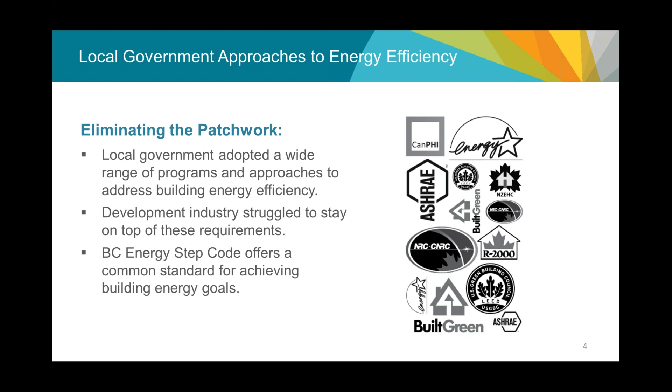Without the building code telling them exactly all the materials and processes they have to use, just doing a really good job of defining the outcome we want and then holding everyone accountable for actually achieving that outcome in a way that makes sense for them. And that may mean something different than the prescriptive requirements we've got in the code.

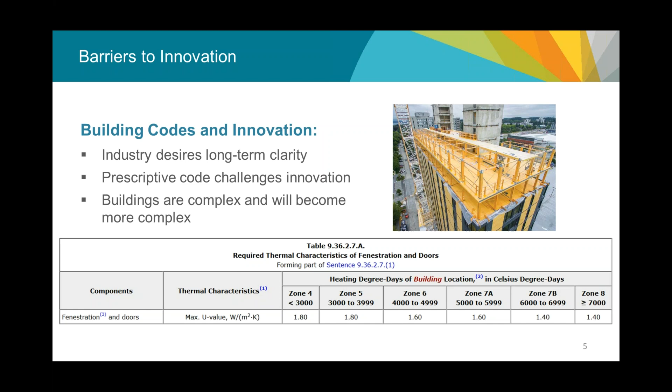It's worth noting before we get into the details, the Energy Step Code is not the product of the province alone. While we did lead the process, it's the result of a consensus building approach where we brought together stakeholders representing a range of different perspectives. We had green building advocates, affordable housing advocates, and a range of different industry groups and experts all at the table, and we worked for 2 years until everyone agreed that what we proposed under the Energy Step Code can work, and detailed the plan around how to make that work in terms of implementation. I think that'll be important in a national process too.

It's not just creating a technical standard, but creating a really comprehensive plan around how we're going to implement changes in the way we build buildings, because that's the biggest challenge we're tackling right now. That requires collaboration with everyone, getting everyone to the table early so each industry can see their own success path in this roadmap towards 2032. It requires an open discussion, getting everyone's ideas on the table and finding consensus, not coming up with a solution beforehand and trying to impose it. I'm pleased with the collaborative approach we took, but I'm here representing a process built on the work of a huge range of volunteers who contributed to this.

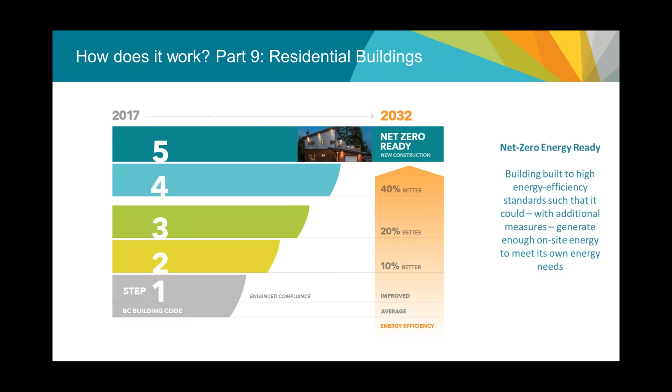So our roadmap to 2032 - I should note, if you see different presentations for different building types, when you work towards consensus with a broad stakeholder group, you often don't get the clean communication consistency you're after. As a result, what we've got for houses and small buildings in British Columbia is a 5-step roadmap towards 2032, built off programs that already exist in the market. The number of steps isn't the number of changes in the building code, because we really only have 2 more editions of the code before 2032. We were trying to reflect levels of performance that already exist in the market in a voluntary way, so we've got 5 steps for homes.

When you get into large Part 3 buildings greater than 3 stories, we only have 4 steps. The end goal is still the same - it's just the logical increments of what builders are already doing, between base building code today at the bottom of the screen, all the way towards our long-term goal of net zero energy ready, ideally by 2032. For non-residential buildings in Part 3 as well, we've only got 3 steps. Again, the number of steps is less relevant - it's the fact that they're all providing that roadmap from where we are today to net zero energy ready by 2032. I think we're likely to see a similar tiered or stepped approach in a national building code.

I should also note, before I move on, the third-party programs shown on the screen today can't be used exclusively to comply with the step code. We haven't referenced any of these programs, except for Passive House, as an alternate compliance path to the step code. They roughly equate to what we do in the step code, but as mentioned earlier, we've redefined energy efficiency in the step code, and it's slightly different from any of the programs, including the EnerGuide rating system that exists. So builders who satisfy Energy Star or Built Green requirements haven't necessarily achieved what we're after in the step code. They're usually 80 or 90% of the way there, but it's important to note that the regulation is slightly different from many of these third-party programs.

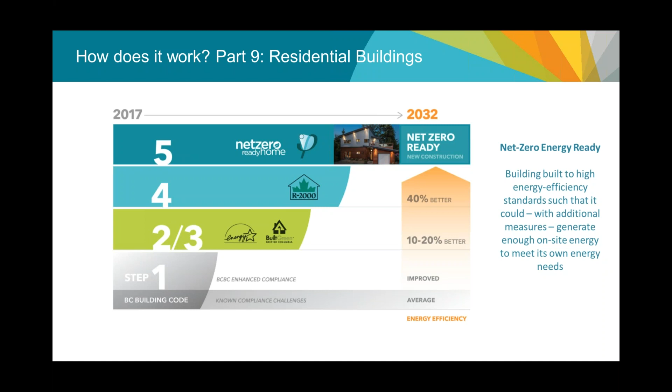The big shift we're seeing in the Energy Step Code in British Columbia, the shift we think is necessary to get to net zero energy ready, is that we need to move towards a performance-based system. We started our discussions in British Columbia around the end goal and talked with stakeholders about what it means to build net zero energy ready, and how builders are doing it today. What we heard loud and clear is that the only people building net zero energy ready buildings today, regardless of how you define that, are doing it with energy modeling and air tightness testing. It's not about a prescriptive checklist of materials you purchase and assume you achieve high performance. If we're going to get to net zero energy ready, the highest level of energy efficiency builders are building to today really has to rely on energy modeling and air tightness testing.

If we do that, we don't need prescriptive requirements, because we're setting clear goals in terms of performance outcomes we're after, requiring an energy model to detail how the building got there in their own custom way, and then holding people accountable through air tightness testing and other inspection measures. To require that and still leave room for innovation, we can remove a lot of the barriers in the prescriptive requirements of the code. We heard loud and clear that there are no programs on the market today that are prescriptive-based and get us towards our end goal. So in British Columbia, we decided that energy modeling and air tightness testing are the skills builders need to become familiar with, that the whole system needs to become familiar with, if we're going to move towards net zero energy ready.

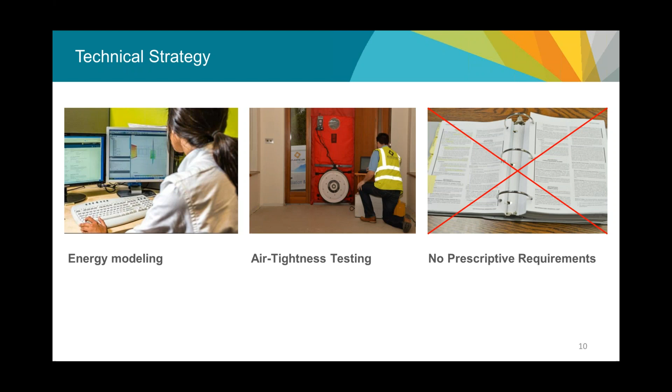The big advantage here - we've got an illustration from a guide we have on the prescriptive requirements in the building code today, and we've got specific requirements for doors, windows, skylights, insulation, depending on where it is in the building. All the details of the building have their own specific individual prescriptive requirements. So long as the builder has satisfied all of these, they're code compliant. But what we found is that really depends on a whole bunch of factors in the home and may not make sense in all situations.

There are some designs where builders may want more efficient windows and ease off on some insulation requirements, or have windows that are perhaps less efficient on a particular building face, and they want to be able to trade that off in a very flexible way. This is how a performance-based approach really allows that flexibility - it removes all of these prescriptive requirements individually and sets one set of expectations for the entire building envelope, then just requires a builder to account for all of those elements and find out what the end result is. It's up to them to choose how they balance that all out.

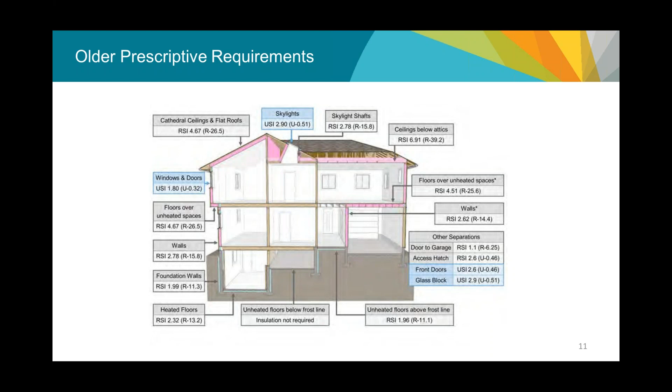It's already a performance pathway in the code today, but for the Energy Step Code, performance-based energy modeling is the only way you can comply with the Energy Step Code. What that does do is really relieve a lot of the challenges we've had with the prescriptive code.

I spent two years as an energy code coach in British Columbia, dealing with builders and building officials trying to enforce the current requirements in the National Building Code, Section 9.36. There are a lot of details that, when you write it out prescriptively, can really cause issues and may be impossible for some projects.

We heard from builders that a lot of these requirements, they know that they don't achieve the energy efficiency gains relative to the amount of work that they require. Telling people that you can't have pot lights in an insulated ceiling assembly doesn't make sense, when a builder can say, well, I can find a way to do that and still achieve the overall goals we're after.

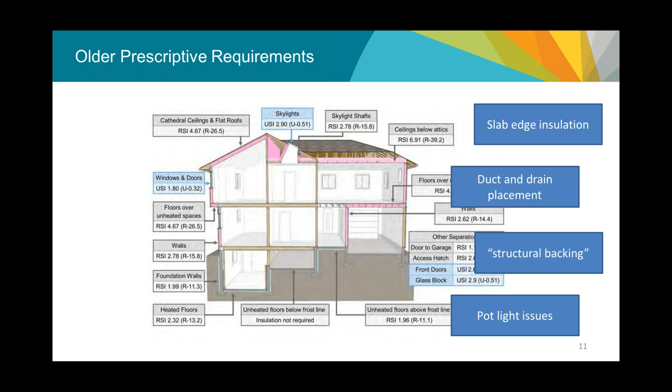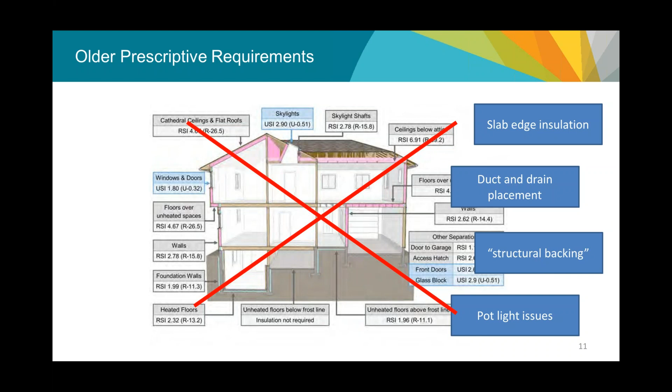But pot lights aren't airtight, and so making them part of the air barrier in a prescriptive code technically can't be approved. In a performance-based system, we can say, well, if you're assuming some air leakage through those pot lights, just make sure the home is airtight through a test. And then the individual components are less important, because what we're after is system-based outcomes. And that's the big shift in the Energy Step Code, is removing all these barriers and headaches in a prescriptive code and getting really clear and accountable on the performance outcomes of the home as a system.

And so a step 3 building just means do an energy model, conduct a blower door test. And for steps 2 through 5, we have specific outcomes that builders have to achieve, or they haven't satisfied the code in terms of airtightness that has to be demonstrated using a blower door test.

And that's really taking a look at the mechanical systems inside the home. How efficient is the heating, ventilation, and hot water systems inside the home, and achieve the performance outcome we're after. They can choose any components they want to get there, but they have to achieve the performance outcome we're after. This is pretty similar to the way we've measured energy efficiency in North America for a long time.

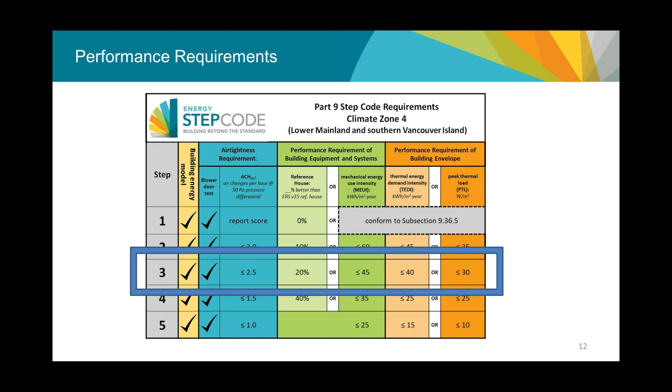So, really worth being aware of this shift in terms of the way we measure energy efficiency. The big change is this shift towards the building envelope.

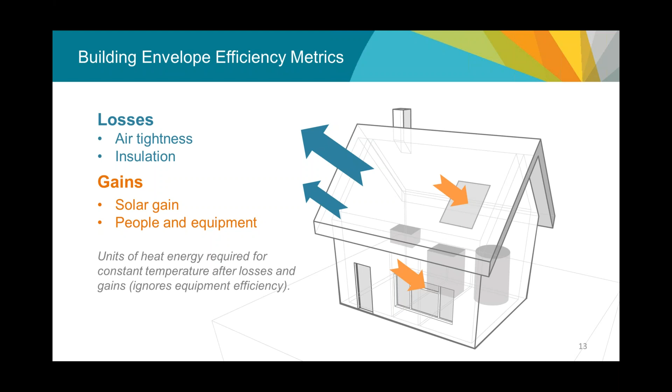I won't go into too much detail here, but happy to share these slides afterwards through Anne. When we're measuring the building envelope, we're taking a look at traditional things, nothing groundbreaking. What's new is that we separate this out from any of the equipment inside the building, taking a look at free gains at the right time of year, and traditionally how we lose energy through the building envelope through insulation and air barrier details.

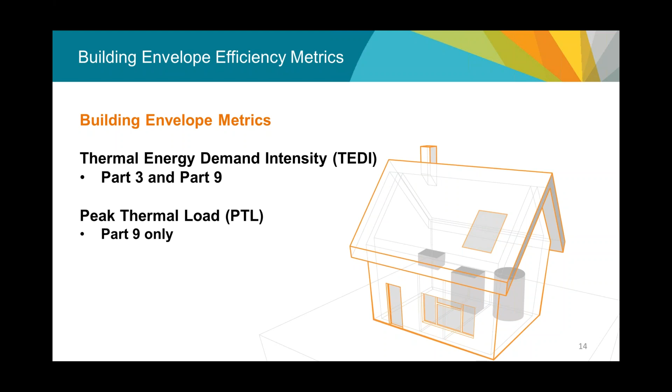That's known as thermal energy demand intensity, TEDI, or peak thermal load. The only difference between these two is peak thermal load takes a look at the highest peak at the most energy intensive day of the year, whereas thermal energy demand takes a look at that annualized over the year, ensuring your average per square meter of energy use in that building is as low as possible. Peak thermal load takes a look at the highest intensity day of the year, and there are different situations where those two metrics might be useful to use.

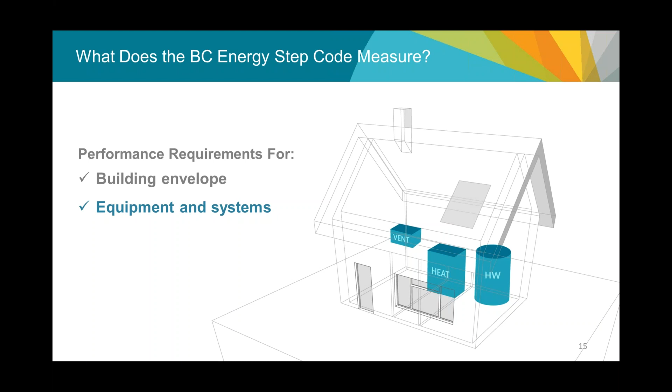Then the other measurements we do have -- we don't want to totally ignore equipment inside the home. We do look at that, but we've separated it out. For ventilation, heating, and hot water, for houses and small buildings, and for large buildings, Part 3 buildings, we're continuing as we do under the National Energy Code for Buildings to take a look at all energy used on site. This is called total energy use intensity for Part 3 buildings -- that's everything on site, our traditional EUI in North America. For homes, it's mechanical energy use intensity. The only difference is that in homes, we scale it down to the equipment that really gets focused on -- we're not taking a look at plug or lighting loads in houses and small buildings.

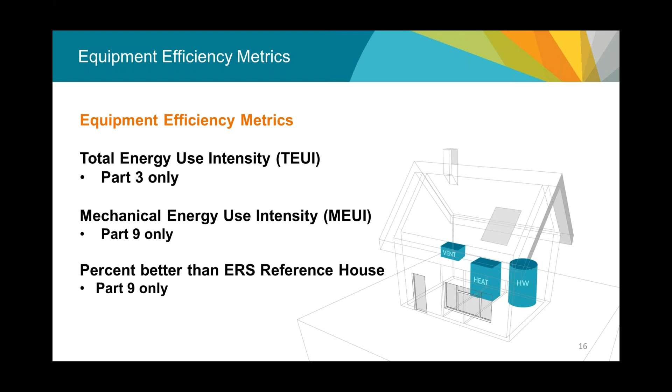And then the other option we've written into our code is that builders can use the EnerGuide rating system, so long as they actually submit their files to Natural Resources Canada, to comply with the Energy Step Code. That's not present today in the National Building Code, but I think would be an important thing to consider nationally.

And then last, but most important, is that we're not just going to assume a building is energy efficient and put it into an energy model -- we're actually going to test it. We're going to do blower door testing on every single building in the Energy Step Code. We think that's certainly necessary in the early years of rolling out this kind of program. We can't just assume energy models are accountable. We know we have problems, certainly in the Vancouver and Victoria area, around air leakage in homes. We need to control that, and the way to control that is to set some targets and require builders to do some testing and be accountable for those outcomes in the code.

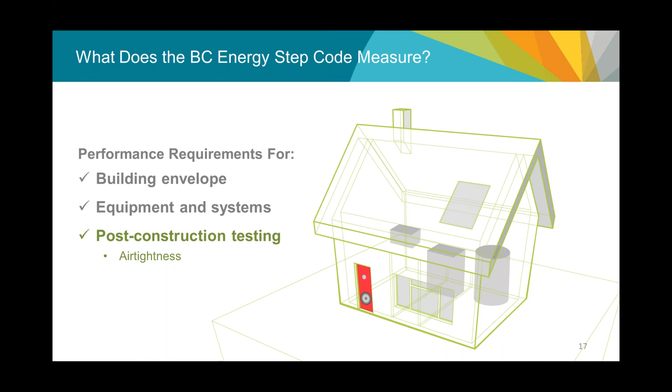So for homes and large buildings, we're going to be requiring post-construction blower door tests, to measure the air leakage of the building. That's going to impact every component and how it's installed in the building. Less of an issue in large buildings, where there's a lot of detail paid to installation of envelope components. More of an issue perhaps where we've got different trades who may or may not be talking to each other well, in terms of installation details for houses and small buildings. We'll really want to be managing that air barrier detail well, because now it's going to be tested and accountable, and everyone on site who touches that building envelope will be part of that accountability system.

So that's our shift in terms of energy efficiency, performance-based, looking at mechanical systems separate from the building envelope. And what's worth trying out here, we've done some research, and I want to draw out a couple findings we have around what this focus on the building envelope means for building design, building construction, and what it means to be compliant. A focus on the building envelope is not brand new, it's not revolutionary.

It does exist to some degree, bundled in with everything else in the prescriptive code today. And so this really means reducing thermal bridging, which admittedly we're doing a reasonably good job of in codes today. But the new piece, when you get to a performance-based system and have the kind of metrics we've got in the Energy Step Code, is that we can actually incorporate not just the materials that are in that building, but non-material elements like the building form and shape and how efficient that is.

How much thermal bridging opportunity are we creating by having bump outs on a building as opposed to a smooth building design? That's really new, but what we're seeing as we get to the highest levels of energy performance, that's going to become really important.

Also, what we're seeing, if you take a look at folks who are looking at the highest levels of energy efficiency in the Passive House program or others, they're taking a look at even window placement in the wall as having an enormous contribution to thermal bridging.

That's not a different product. That's just a design decision about whether you've got a large sill inside or outside the window, which can have an enormous impact on how effective the wall assembly is, just by placing that door or window in line or not in line with the insulation plane.

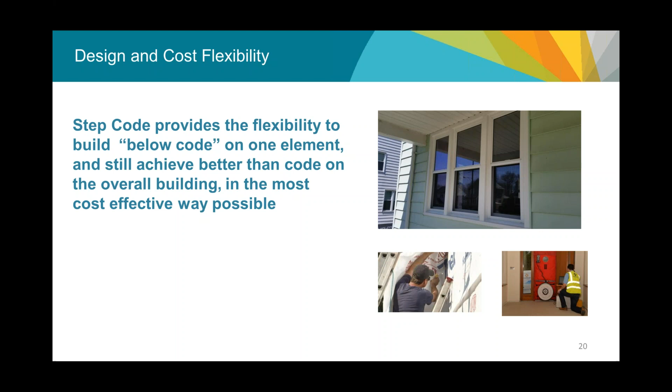And for some designs, it may make sense to have a slightly less efficient window in a particular situation and maybe save money there and invest in other windows in the home or make other trade-offs. A performance-based approach does allow that. We really wanted to make sure building officials and others were aware of that, because there's some real opportunities to rebalance how we design and construct homes to minimize cost impact and maximize energy efficiency.

In some of the research we've done, called the Metrics Research Report, this is our costing research. We identified some key elements that when we were searching for the lowest cost ways of satisfying the Energy Step Code, there were some key components where the energy model suggested we may want to dip slightly below what the minimum code expectations are in different climate zones depending on the building type.

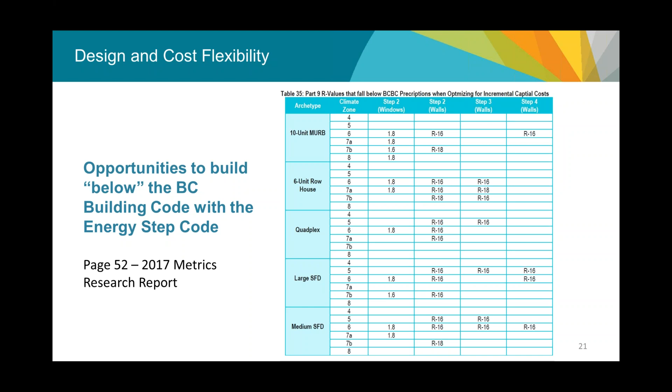Not in all situations. Generally, we are going to have to improve all components in the building. But as we're moving towards these incremental steps moving forward, a performance-based system resets some of our expectations, and we need to be prepared for that. We need to take a look at the building as a whole, as a system, and focus less on the individual components. We need to know how they all perform, but there isn't necessarily a minimum expectation on each component.

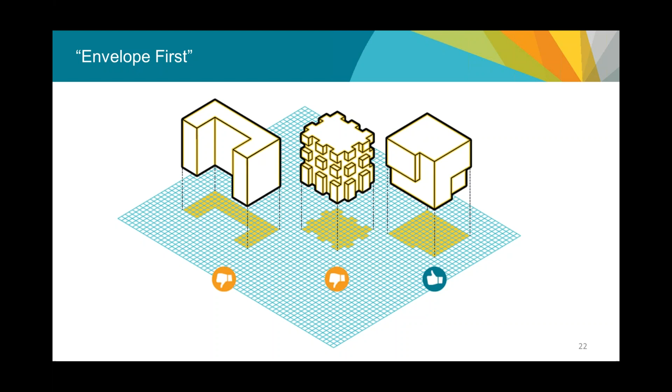And then a more simple cube-like form, maybe a little brutalist in its shape. Hopefully we get some windows on there to brighten things up. But these 3 shapes, what we found, have dramatically different outcomes in terms of energy efficiency, just based on these design decisions that we make, not new materials.

The exact same materials in the building achieve very different outcomes in terms of energy efficiency. That's where we found this approach in the energy step code measures these differences. From the simplest to the most complex shape that we were showing previously, that's enough to move the same building with the same components, so the same costs other than labor for the complexity of those shapes, to move a building up 2 steps in the energy step code.

This is for large buildings, but this was really an eye-opener for us and really revealed the importance of moving beyond just focusing on requirements for individual components, and really taking a look at the home as a system, including its form factor, including taking a look at how we design buildings and finding a way of driving change there.

Now, a cube certainly creates an architectural challenge in terms of making that beautiful and interesting, but I believe the architects of Canada are up to the challenge.

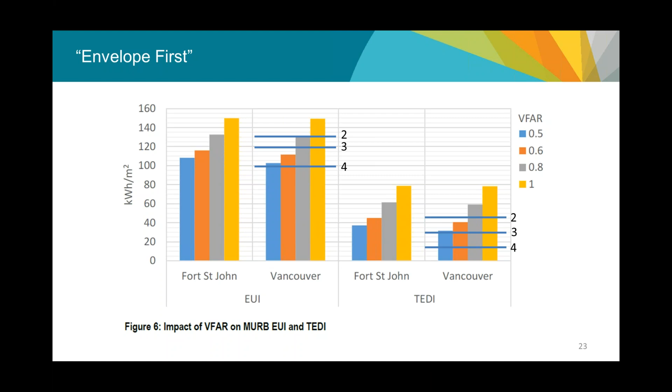But what we need to reveal now is that if we're going to hold project teams accountable for energy efficiency in buildings, that means accounting for every element, not just the components they purchase, but the design decisions that they make. A performance-based approach allows us to start getting at some of that and encouraging that change, then allowing builders to maybe back off some of the investments in more expensive, complex mechanical or envelope components.

And then last is air tightness testing. We've talked about that already. That was the other one in our research that came away, certainly in our climate zone, in climate zone 4 and 5, as really a low cost option that's really about quality assurance. If you can improve your air tightness, you can make dramatic gains, by 2 or even 3 steps in some cases for the same building, just by improving the air tightness performance.

That's about builders who just need to focus on doing a great job in the building envelope, many of whom are doing that today. Unless we do testing, we don't have any way for consumers to know the difference between a builder who's doing a great job on a building envelope and all the envelope component installs, and one who needs some improvement. They don't know that until we do some testing and have some results for people to look at. So that was a really important takeaway for us in the building envelope focus in the Energy Step Code.

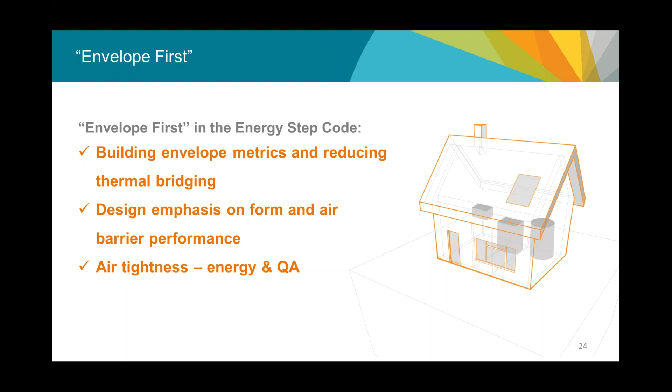We can see that the climate is warming, and what that's going to mean is that we need a really complex understanding of building performance, not only for heating, because we're very quickly in some parts of Canada moving to a shift where we may become a cooling dominated climate, particularly in the lower mainland of British Columbia. We really need to think about how all the building components we have contribute today towards minimizing heating demand, and in the future minimizing cooling demand as the climate changes. We really can't do that unless we have energy modeling and some really complex understanding of these buildings, because the climate is changing and we need to be prepared for that.

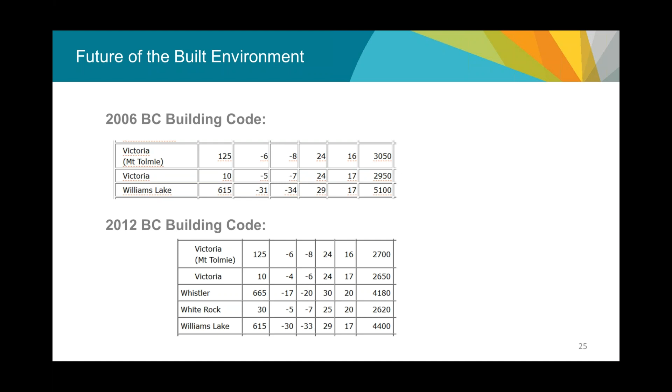We believe this approach sets everyone up with the information they need to make decisions for that. We've got about 3 minutes left. I'll just touch base very briefly on how the Energy Step Code is being implemented in British Columbia. As of December, local governments have started to consult on implementing the Energy Step Code and implement it.

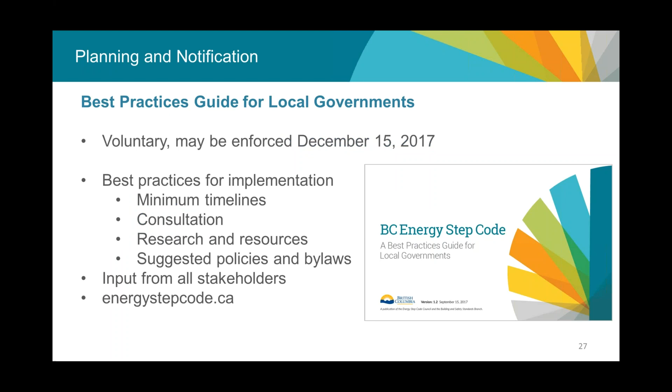We provided some best practice guidelines for how local governments can incentivize or require the Energy Step Code, along with clear expectations on minimum timelines between telling builders you're thinking about implementing the Step Code and actually requiring them to do it on site. We're happy to say that 100% of local governments who are consulting on Step Code today have been following these guidelines.

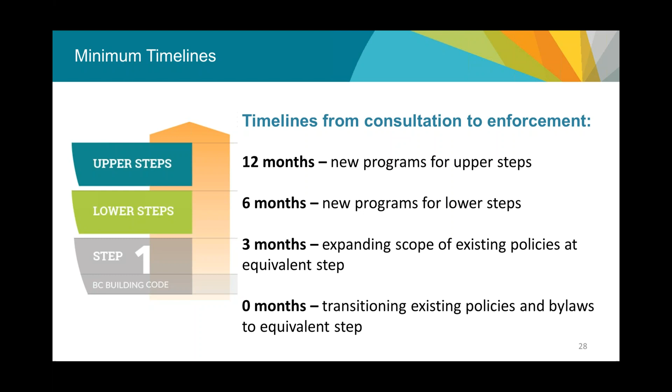What this really showed us in a national context is that as we make these changes, we need to think about how we can incentivize leaders to take on some leadership, try some improved energy efficiency, and then share that learning. We're seeing local governments do that as well.

We've got 25 local governments today in British Columbia consulting or who have adopted the Energy Step Code, all focusing on the lower steps. What we're seeing is some good consistency between these local governments, but also a number of local governments around them who maybe don't have capacity or political interest for one reason or another to move forward on energy efficiency, but they're going to be able to learn from that.

I think in the national context, we need to think about how we can learn from those who are leading, and make sure that as we move the entire market forward in a much broader way, that we learn from any lessons that industry leaders have learned.

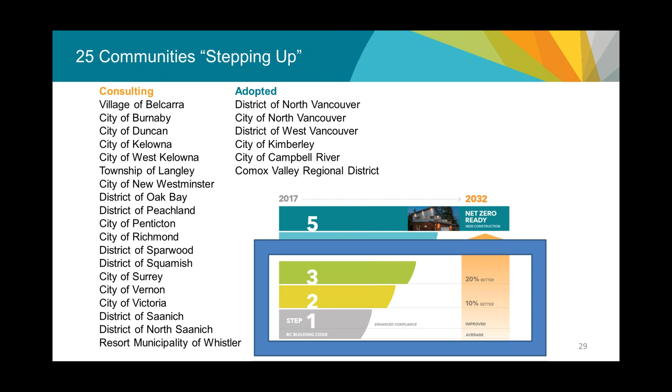If you're looking to know what the future is, I would suggest in British Columbia, talk to builders in these communities, what they're asking for, what's suddenly important to them as they make this shift towards high performance buildings. That's where we're likely going to see our peek at what 2032 looks like in terms of home construction.

The other change, I won't go into too much detail, but it's really important to note, is that as we shift towards high performance buildings, and particularly a performance-based system, that changes what it means to do inspections and code compliance. We're working with Natural Resources Canada and building officials in British Columbia to really unpack that and provide building officials with a standardized way of inspecting for code compliance, when the building code will no longer provide them with a checklist of all the component expectations on the building.

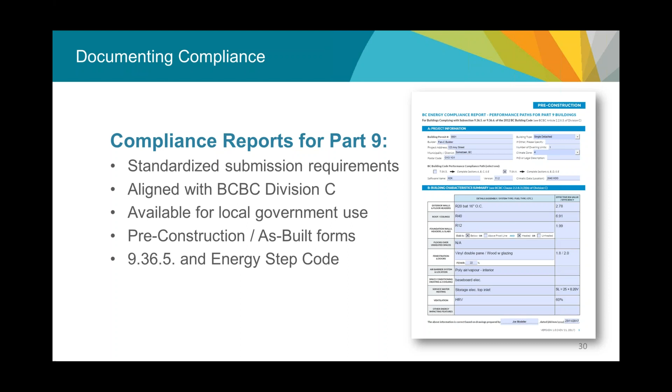So we're creating standardized reports, but everyone needs to work collaboratively to understand what code compliance looks like in the future. That means connecting a lot more dots and information, and having everyone be accountable for their own products and components as we go forward.

Last, and we could go on for hours about this, but I'm keen to dive into questions from you, is just some brief findings we have from our costing research that we've done. We have the full 100-page study available on our website, at gov.bc.ca/buildingcodes, or if you go to energystepcode.ca.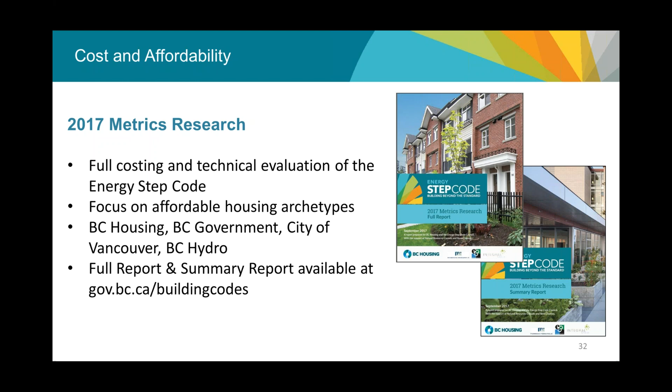What we did in this study is take a look and say, we've got our assumptions on how energy efficient we want to make buildings under the Energy Step Code. Let's take a focus, and this was led by BC Housing, on affordable housing archetypes, and find out what this costs in each climate zone for each of these different building types to achieve each level of the Energy Step Code, with a real focus on what is the most cost-effective way to reach each of the steps.

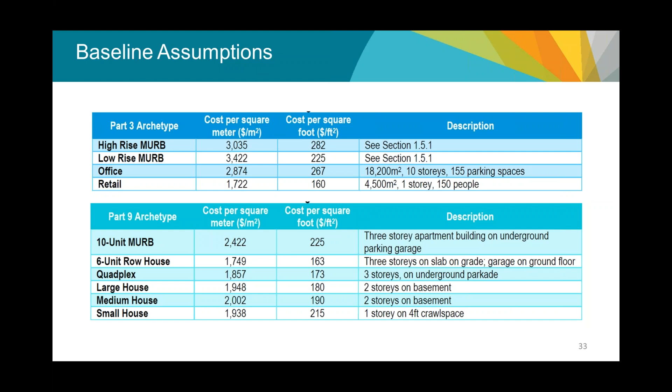We found some really interesting findings when we ran hundreds of thousands of energy models and then selected for the most cost-effective options that achieve the best results at the lowest incremental capital cost.

There's been some debate in the market about whether the costs are accurate or not relative to what's happening on construction sites. Separate from that debate, I think what we have revealed is at least elements from that study that really demonstrate what gets the best bang for your buck, whether you agree in exactly what that dollar cost is, separate from whether it actually has a significant impact.

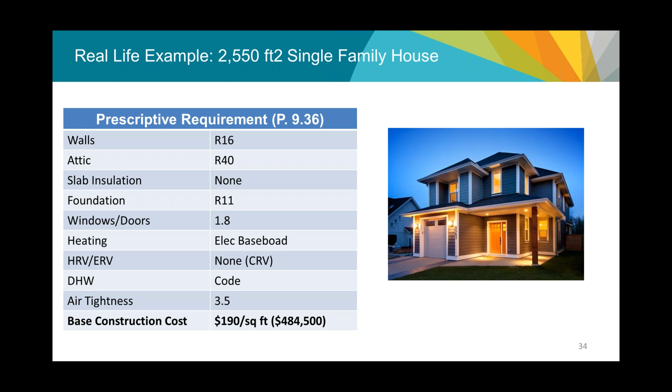What we did here is we've got our prescriptive home in climate zone 4, so we've got all the prescriptive requirements met there. To take that building to step 3, without going through all the details, I've highlighted in green here, we only need to improve a few key elements here.

A little bit of extra insulation. We haven't changed anything in the attic. The doors and windows remain the same at a U value of 1.8. And then some slight improvements in ventilation and domestic hot water, and improvement in air tightness.

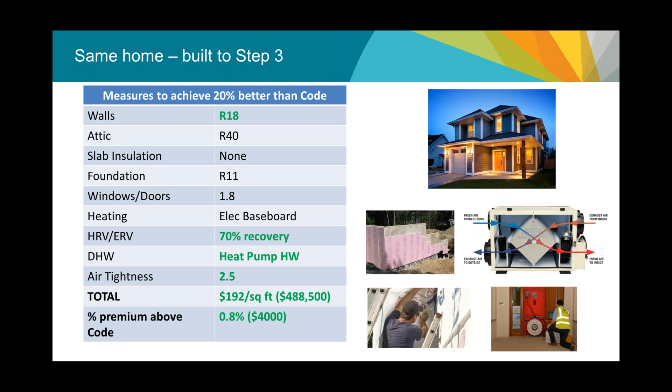We've got multiple examples of this, here's another home in climate zone 5. Again, we have an opportunity here to back off of some of the prescriptive requirements in orange, and go beyond the prescriptive requirements in green, achieving 20% better than the code under the Energy Step Code, with really no cost increment, because we're able to back off of some elements and reinvest in others, focused most on our energy outcomes as opposed to the prescriptive requirements in the code.

And that was a really revealing finding for us, that we don't need to change everything in the building. We need to identify the components that have the most impact on energy efficiency and focus on those.

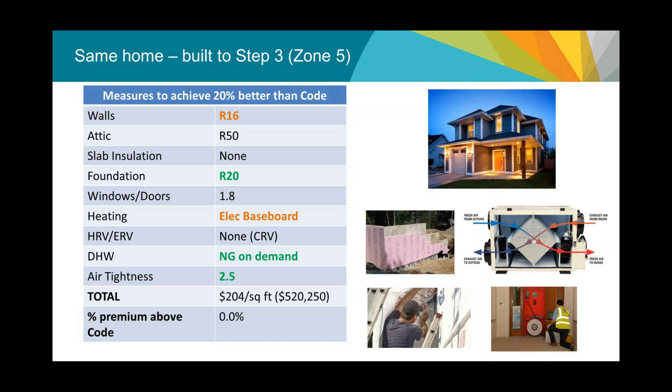Of course, the other findings that we had from that research, and that I've talked about in the presentation today, is that building orientation and shape does have a significant impact on energy efficiency, that simple shapes are more cost effective to build and more energy efficient, and that the most cost effective time to invest is at conceptual design.

But for manufacturers and suppliers, it's really worth noting that the need for detailed, accurate information at the conceptual design stage is increasing, and we need to move to a point where suppliers are accountable for their products and are providing all the energy efficiency related information prior to the products being built. We need to know ahead of time so that can be factored into designs, or else it's going to be really challenging for builders and designers to know what their own path towards a particular step looks like. I think that's likely to be a trend we see nationally as well.

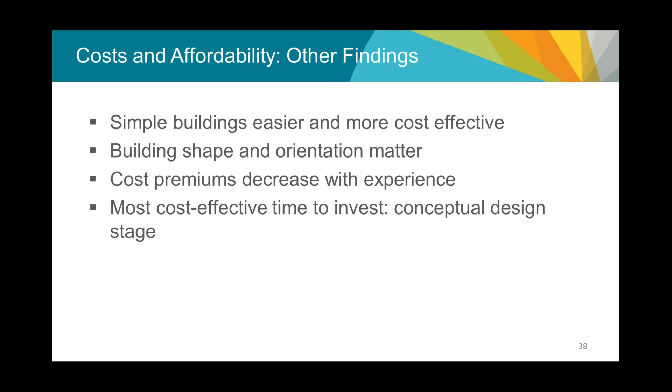With that, we've got 17 minutes for questions. Happy to take questions.